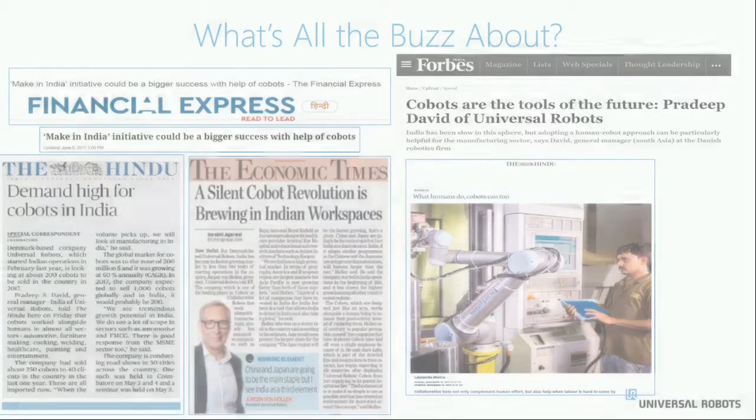The cobot market has been growing with a compound annual growth of 50%, one of the highest growth rates in the automation industry, in comparison to the industrial robot, which had a growth of just 5% in 2018. From the smallest companies to the largest multinational manufacturers, collaborative robots enable affordable, accessible automation to everyone. Cobots democratize automation by allowing manufacturers of all sizes to automate applications they may not have been able to originally, thanks to their flexibility, ease of use, and low footprint.

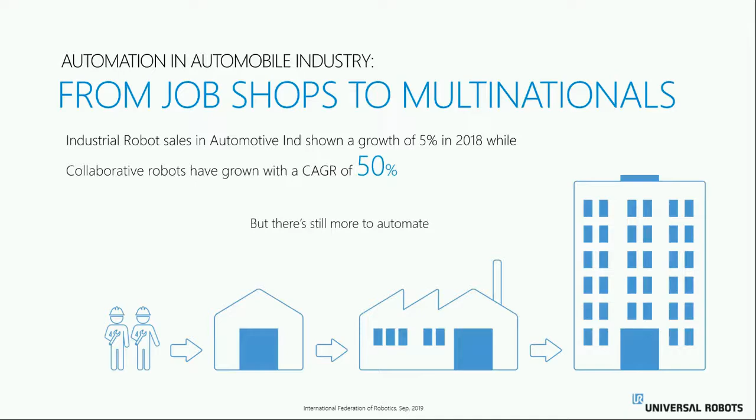To illustrate some of the reasons why cobots are becoming the automation solution of choice, have a look at this video.

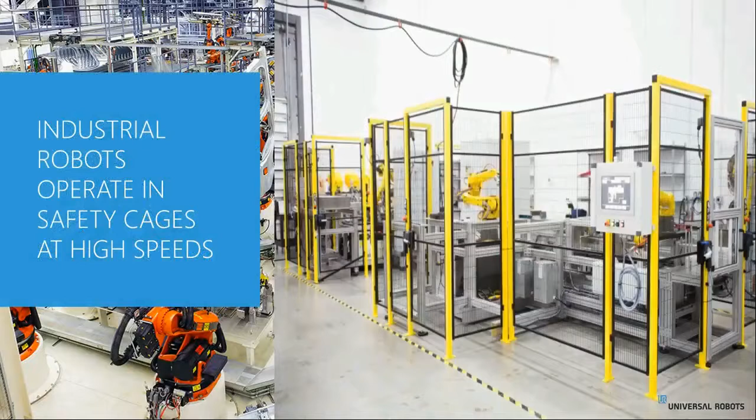I'm sure you saw some interesting features of the cobot throughout the video. Now let us go into further detail of this product. As you may already know, these are traditional industrial robots. If you compare these to the cobots you saw in the video, you will notice a lot of differences.

First and foremost, you will notice that industrial robots operate in safety cages. They are bulky and take up tons of space on the shop floor, so you can only deploy them if you have a lot of space.

You can also see many more differences here. If we compare industrial robots, they are large, fixed equipment, typically require a safety cage, are designed for high volume, high speed production, and are difficult to change to different processes or product lines. On the other hand, collaborative robots are small and flexible to fit any shop floor or process, work at about the same speed as a human worker, have fast setup, are easy to use, and are safe alongside workers.

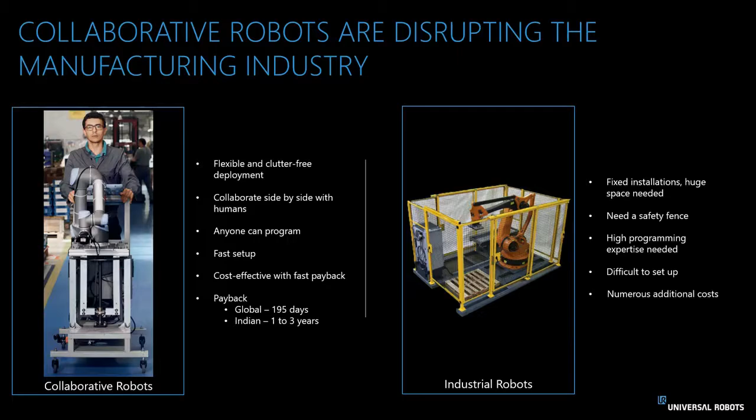Even though we can see the difference between these two automation approaches, we are actually just seeing the tip of the iceberg. This slide shows the difference between industrial robots versus cobots in terms of their implementation cost. If we talk about industrial robots, the first and foremost thing is the space requirements, which is 50% more considering any application.

Other than the hardware cost of the equipment, there are several other costs related to implementation of industrial robots like end of arm tooling, safety scanners, light curtain, three-phase power, software upgrade cost, integration and programming if the process changes during operation, and majorly maintenance cost, which is quite huge for any end user to maintain the robot life.

On the other hand, collaborative robots work on a single phase supply of 220 volts, which we generally use to run our mixer grinder or to charge our mobile phones. Cobots give huge savings in terms of power consumption. Other related costs are only for hardware equipment and the end of arm tooling. For the Indian market, we calculated this as 6.5 lakhs of saving in 5 years of operation. This excludes the amount saved on space, which is an additional cost advantage.

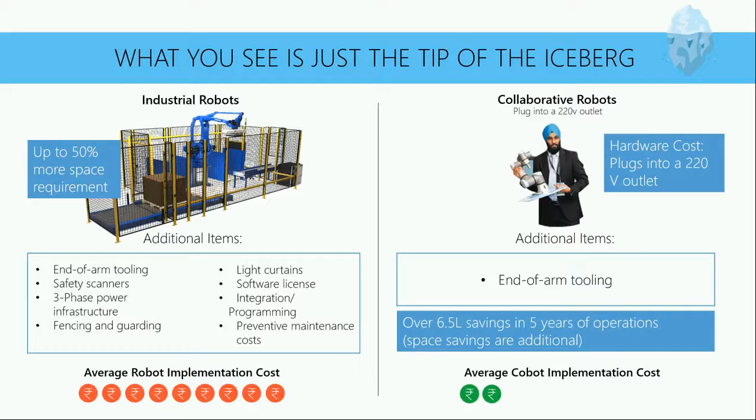You will be wondering, what is this ISO TS 15066? Just as the ISO standard 10218-1 and -2 defines 4 different methods to achieve collaborative operation, the ISO/TS 15066 does the same. It just adds some more guidance and requirements to the specification.

Safety rated monitored stop. A traditional robot used within a fence: a person can enter the workspace through an opening like a door switch, light curtain, or safe camera solution which identifies the person entering. When a person enters, the robot is paused. A safety rated stop function is used while the person goes in and does his job, for example loading, unloading of parts. When the person leaves the workspace, the robot can resume automatic operation. Calling this method collaborative seems a bit odd, but the standard defines it as collaborative because electricity is maintained to the robot motors while a person is present.

Second feature is hand guiding. This is hand guiding as a part of a robot operation, performing the work, not the teaching or the programming. This should not be confused with hand guided programming of cobots. This method is used in a traditional robot inside a fence when a person is entering the cell periodically as part of normal operation, that is to adjust a pose or to screw some screws in. When he enters, the traditional robot changes from non-collaborative to some collaborative mode. For example, maximum speed could be 100 mm per second and adjustment movement plus minus 50 mm. The car industry has used this method for several years to place chairs inside cars and to hold bumpers while they are screwing in place.

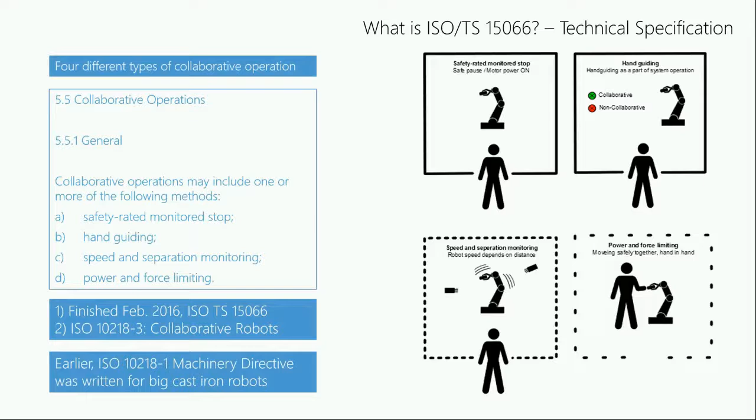By default, UR is giving all the 4 features in the software. Other than the ISO TS 15066 standard, UR Cobots has a patented safety system with adjustable functions which allow work at ease in a collaborative operation. Functions like joint position, joint speed, TCP position, tool orientation, force, momentum and power.

From the product line, Universal Robots offer 2 series, CB3 and E series. CB3 has 3 models, whereas E series has 4 models with different payload and reach. The models are UR3/UR3E, UR5, UR5E, UR10, UR10E and UR16E.

Our E series is the latest range of cobots. Compared to our previous generation of cobots, it has improved sensitivity with built-in FT sensor for process applications like polishing, grinding, deburring, etc. It's 4 times faster than our previous generation series with category 3 PLD safety, having 17 built-in safety functions with stopping time and stopping distance functionality, higher flexibility in the wrist 2 joints to avoid any pinching during motion. All the software updates are possible with one single file with easy programming flow given on the new capacitive widescreen Teach Pendant.

Universal Robots has set the standard for collaborative robots with fast setup, easy programming, collaborative safety, and flexible redeployment. Let's see short videos on each to better understand, one by one.

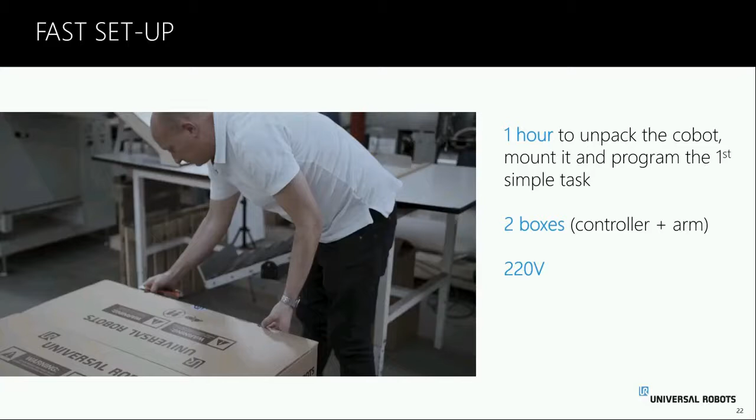You already saw the Cobot setup in the video I showed in the beginning, so I won't play this again. But our Cobot comes in 2 boxes. One contains the robot arm and the other one has the control box. It takes approximately 1 hour to unpack the Cobot, mount it and program for a simple task.

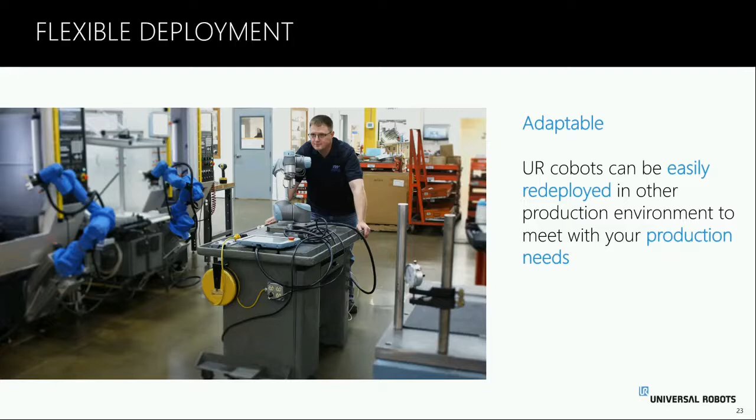As you can see in the picture, how UR Cobots can be easily redeployed in other production environments without changing the layout on the shop floors.

This is a collaborative robot, also called Cobot. It's a 6-axis robot that can be used for multiple applications.

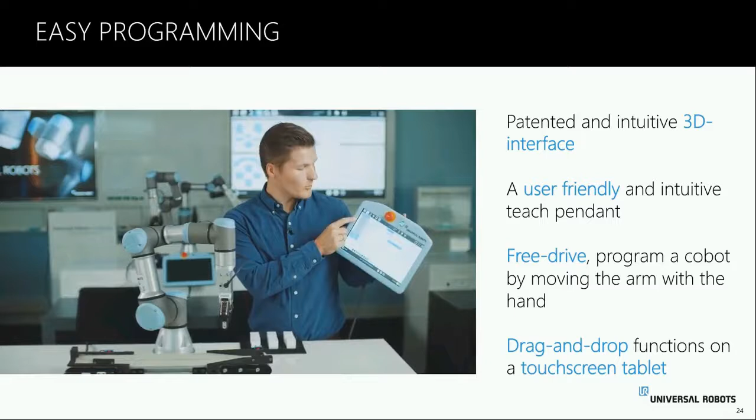Here we have the Teach Pendant. On the teach pendant we also have a free drive button which we can hold in, and then we can take the robot and move it into a certain position. We can also in our program tree take which function we would like and put it into our program. I have now made a small pick and place application that I will show you.

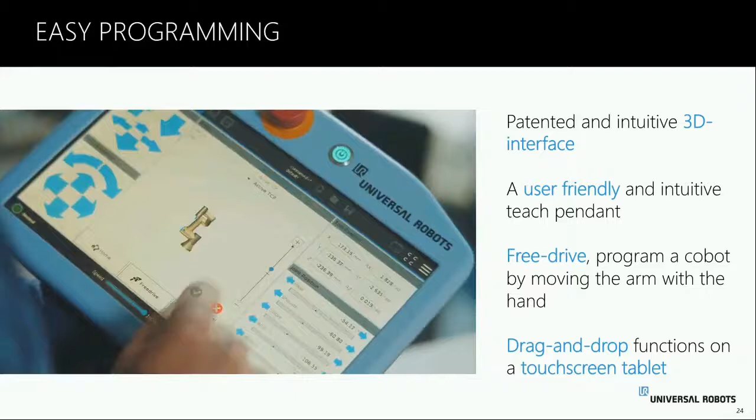One of the main advantages of Cobots is the safety. This Cobot has 17 built-in safety functions.

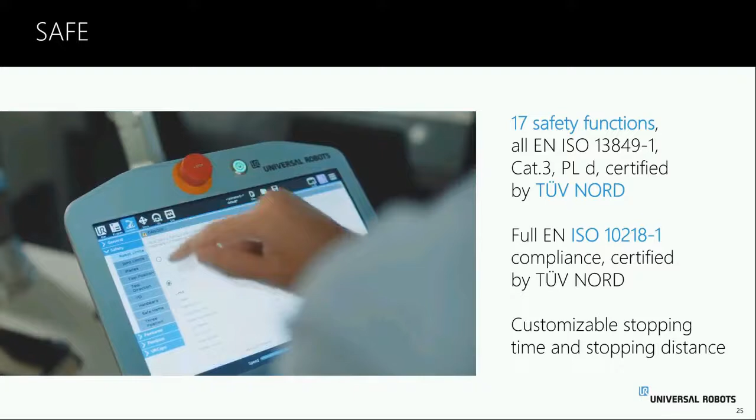Among the 17 safety functions, we have force limiting, which means that when the Cobot is in action and I accidentally step in the way of it, it stops, and I can just start it again from that point in the program.

Another feature is the safety planes, which can be set up to reduce the workspace of the robot so it can't collide with humans or equipment.

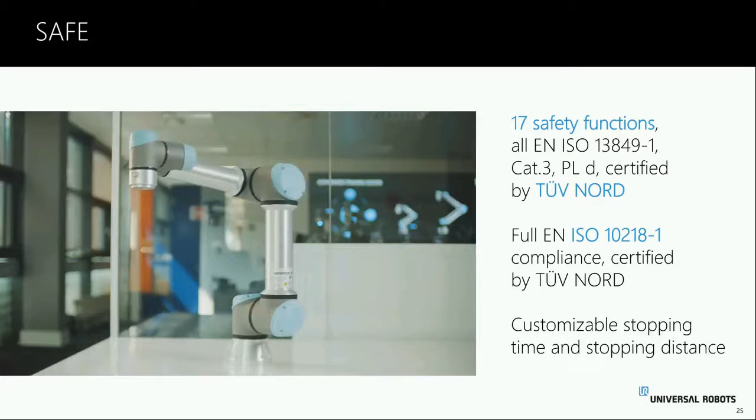Mankind's journey in manufacturing has gone through various industrial revolutions. While it is most widely agreed that humans are now in the fourth generation of industry, or Industry 4.0, many people, including our own company and founder, believe that we are actually on the fifth industrial revolution, where humans and robots are working together better and faster, enabling higher value creations.

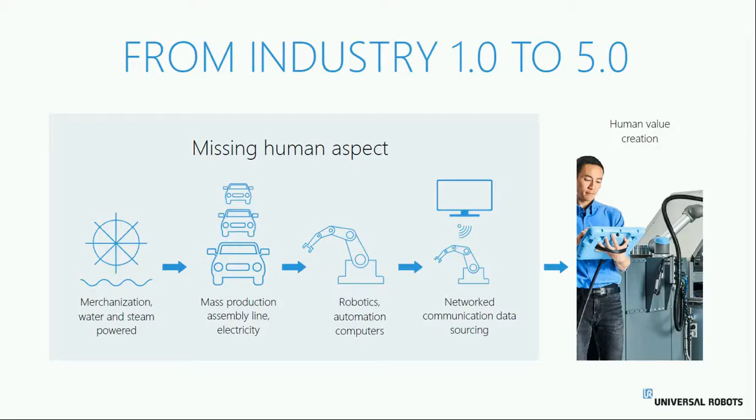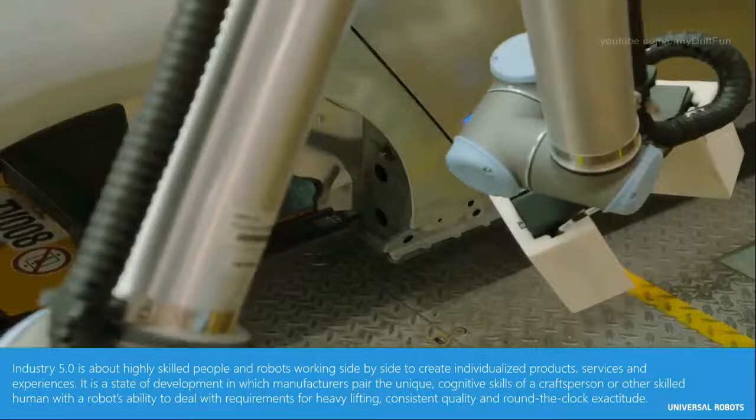However, you will see the cobots are not alone. There are also humans walking between the cobots to check that everything is running smoothly. Here, cobots and humans are working hand in hand, side by side. The intellect of humans is indeed paired with the consistency and precision of the cobots, ensuring that both do what they do best to churn out perfect quality.

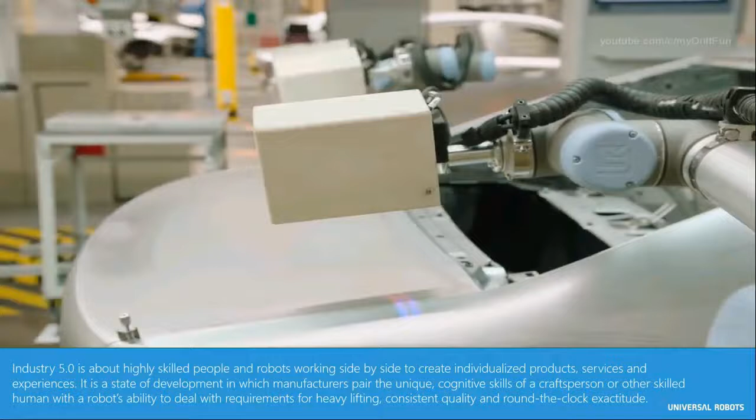By now, I hope you have noticed that instead of a big bulky machine, our cobot is like a tool that can be used to give a competitive advantage to manufacturers.

Now let's get into the possible applications of collaborative robots. In order to help identify the right application, one must carefully look into where the current automation gaps are.

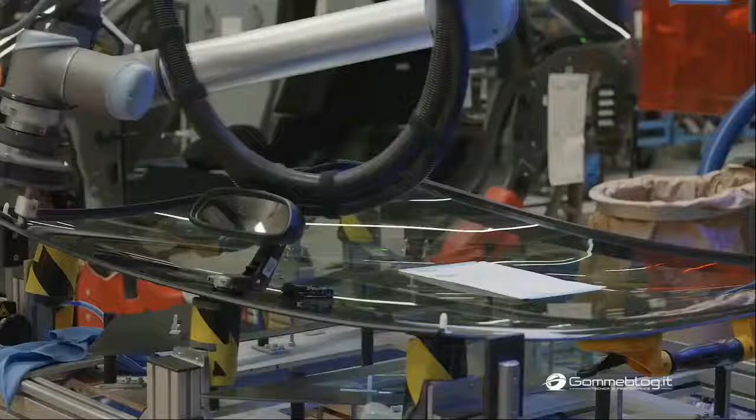This application is for glue dispensing on windshield glass for cars. Here, a UR10 Cobot is inverted mounted, which shows the flexibility of UR Cobots to be mounted in any desired position or angle. You notice that humans are also working alongside the Cobot on the assembly line without any cages. The 360 rotation on each joint gives more flexibility in terms of programming the robot.

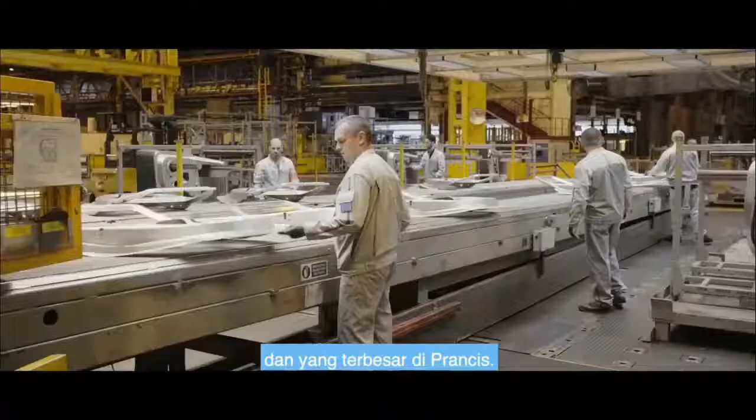This example is for a screwdriving application, which is nowadays in demand by industry who are using collaborative robots, as screwdriving is an essential task that requires precision and also presents a high ergonomic risk to workers due to the repetitive movements and pressure in the hands.

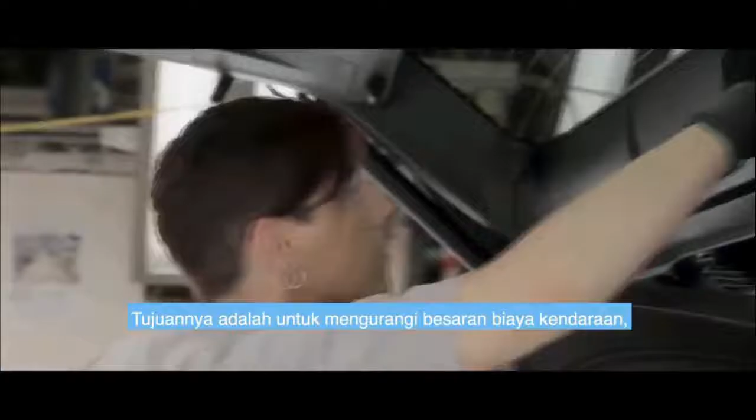I'm sure you have heard of Group PSA, the French automobile manufacturer, which includes huge car brands such as Opel, Citroën and Peugeot. They are using two UR10 robots for screwdriving in their assembly lines, suspended upside down. The robot has to screw on both sides of the vehicles without bothering the operators who simultaneously work at other assembly operations.

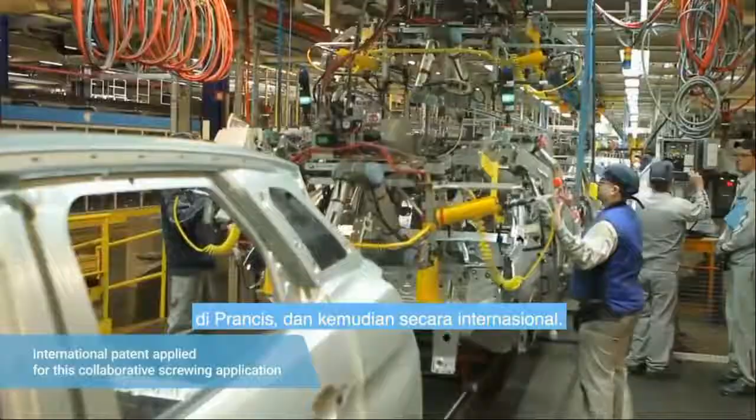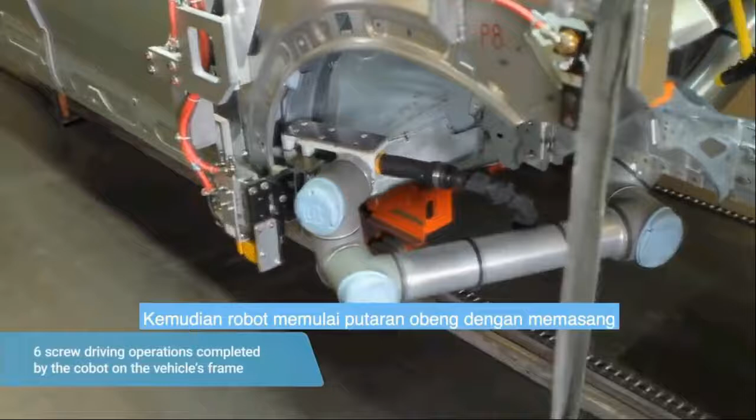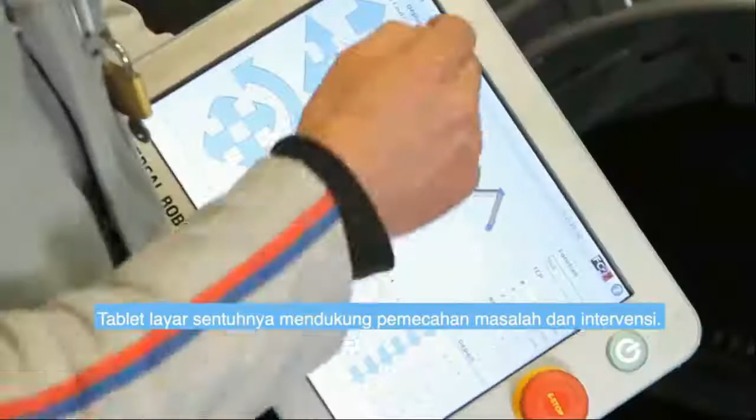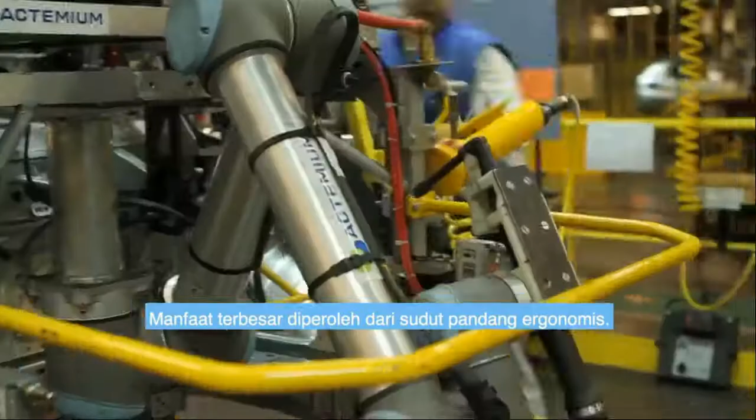In fact, Group PSA realized this new application was unique and even decided to patent the entire application, integrating the UR10 robot on a national and international scale. You will notice that a lot of flexibility is required for this kind of application. A traditional industrial robot would not be able to operate upside down or without cages with people on the shop floor, and fit so easily under the car body in places that are hard to reach. Only a collaborative robot can be used.

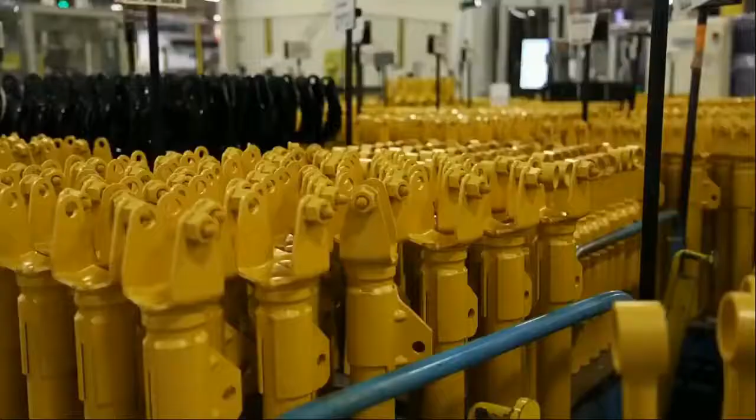At the plant in Hamilton, Ohio, 9 universal robots now enhance production, handling machine tending, assembly, and inspection tasks.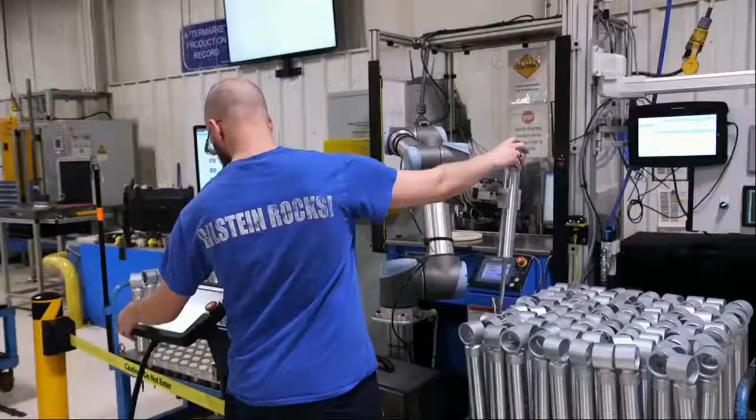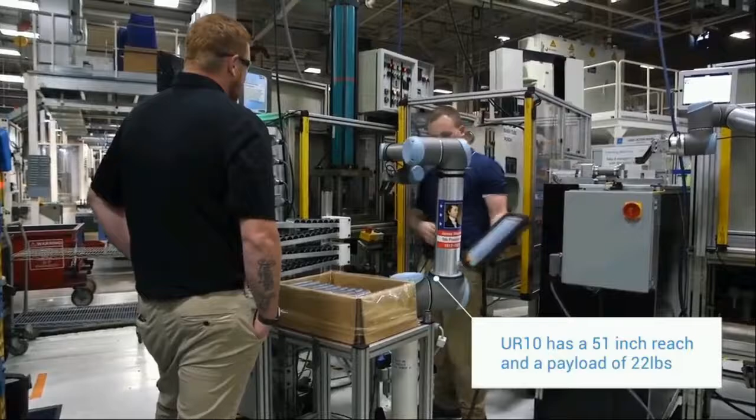We decided to partner with one source, one type of cobot, and that's when we picked our first cobot with UR. We investigated a few other options. The UR had the most advanced solution for more precise pick and place, repetitive, easy to maintain, easy to program, and I think the most important was the speed.

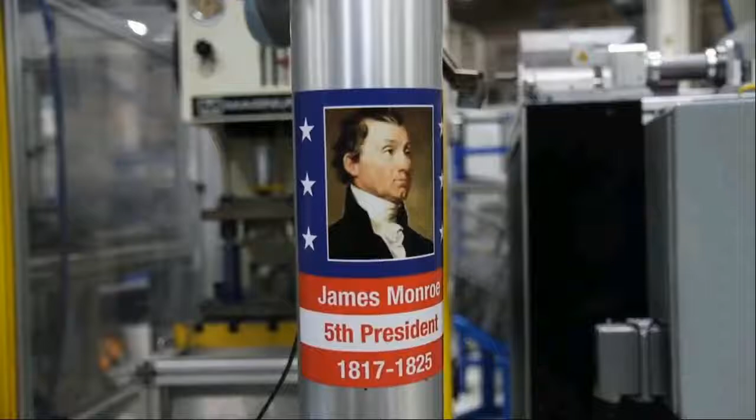It has been fantastic. Today we have 9+ projects implemented and another list of 40 more to be implemented. Our president and CEO came with the idea of naming them after the presidents of the US. So we started with the very first one, George Washington, and so far we have had 10 other presidents already in our facility. So this is a very important facility.

Once we got the first one done, it really spread quickly. We started to notice different applications all around the plant.

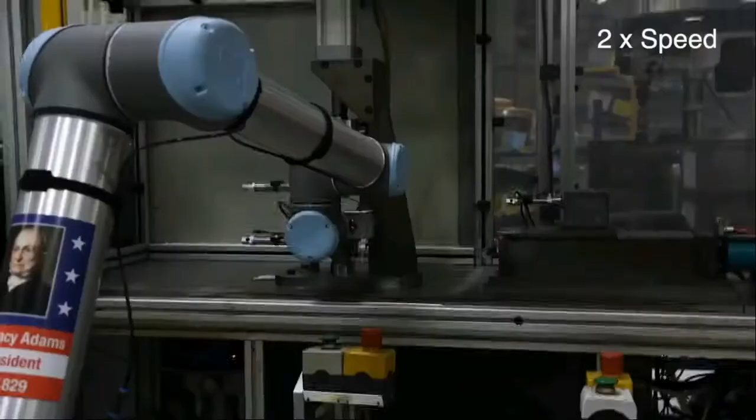The one robot has the inner tube, it forms it, punches a hole in it, and then places it on the transfer fixture. The second robot then picks that up, loads it into the marriage station where it grabs the outer tube and marries them together, then forms them one more time and sticks it on the exit chute. The UR10s also perform cleaning operations on the ends of the tubes, prepping them for welding.

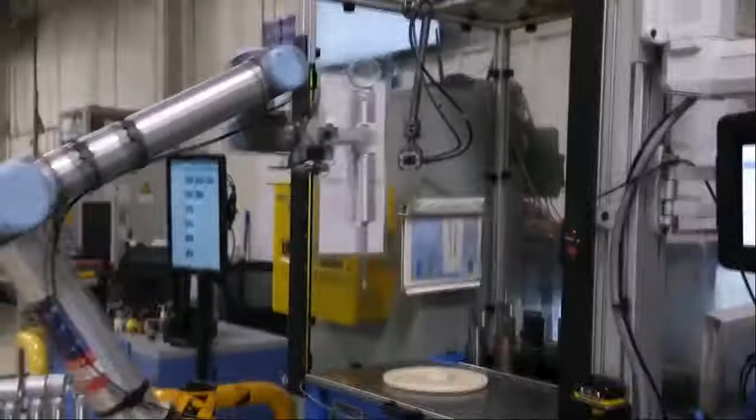In the final assembly, the cobots handle post-crimp fill and inspection. Before we would check 2 parts every hour to make sure we were still where we thought we were, but now we have 100% inspection.

There are different sorts of projects. There are projects that have longer ROIs and projects that have short ROI. Collaborative robots we see as a quicker return on investment. Right now we are attacking the ROIs that are between 10 and 14 months.

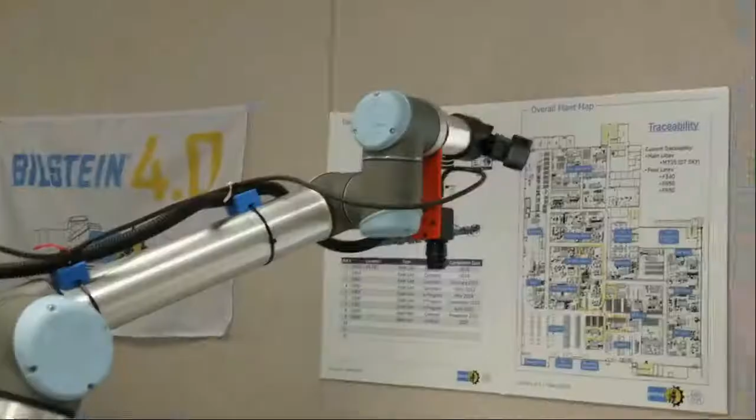For testing new applications, we have both the demo unit robots. In addition to that, we actually use RoboDK, and that helps to actually see the robot going through its workflow, figure out if our cycle time is going to be accurate enough that it's worth prototyping and getting it out there. And then whenever we deliver it, it's almost ready to go.

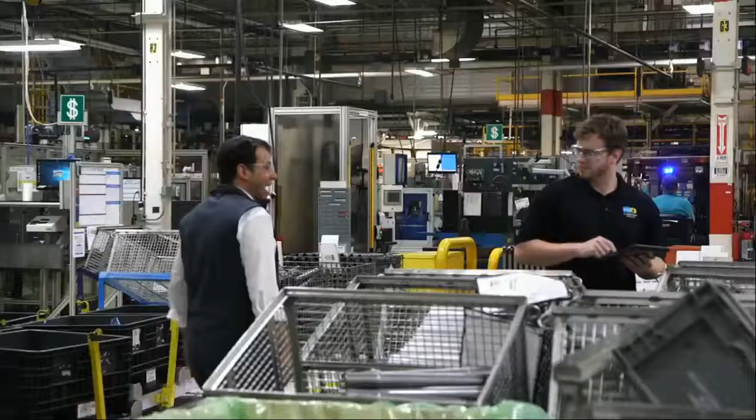The goal was not just deploying Industry 4.0 and cobots in this plant, it was literally to enhance the experience of our employees and to make this place a good place to work.

Operators are at the forefront of all the building that goes on in this company, so asking them, hey, where can we help you to improve the process, to improve the quality of this product, we find that very useful. No operator will lose their job due to a collaborative robot being implemented.

A lot of disruptions are happening in the auto industry. To survive, we need to do continuous improvement, do better than what we were doing yesterday.

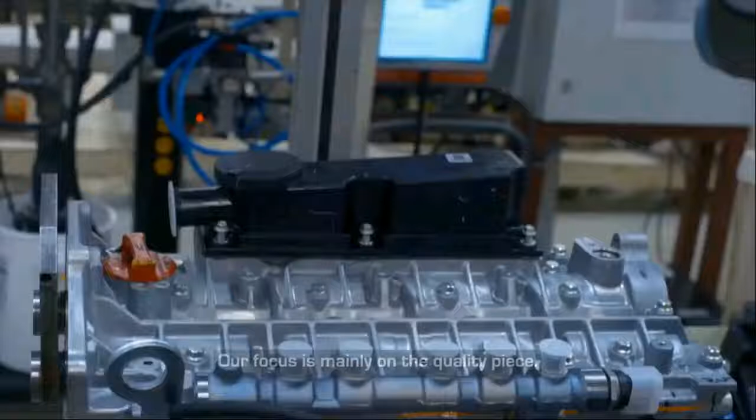I have been working here the last 25 years. Our focus is mainly on the quality piece. Whichever is critical to quality, we want to automate it. One of our team members gave a thought, can we go for a cobot, collaborative robot? We can implement it online and it can work with our associates.

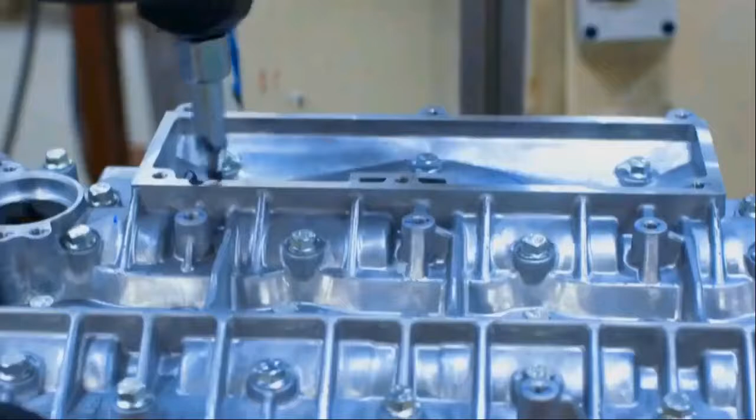It's not only the sealant application or the tightening application. There is a camera which checks the quality and it gets recorded. We are able to real-time monitor the cobot performance also. It is very safe, easy to teach, very flexible. When the cobot is working with them, people are loving it.

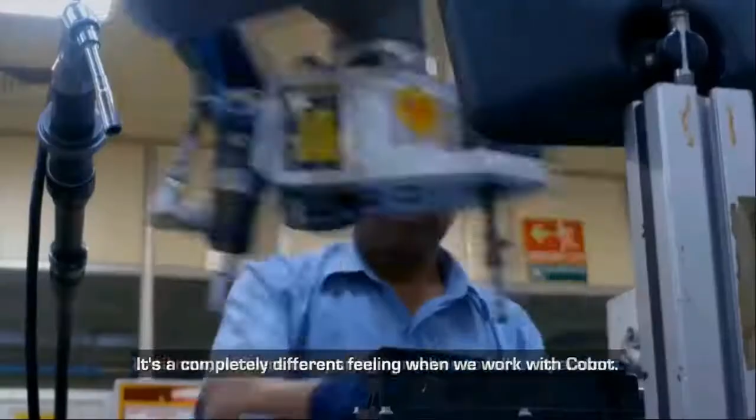The future is enormous. We all have to continuously improve with respect to what we were doing yesterday.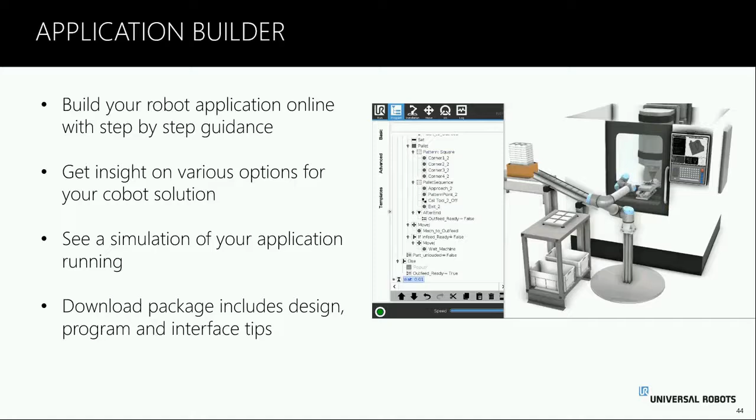We keep saying that our cobots are easy to program, but just to give everyone the chance to see it for themselves, we have Universal Robots Academy. It's a free online platform where anyone can learn to program our cobots in just a few hours.

Fill your automation gaps. Once you identify where your automation gaps are, you can identify the right application to optimize your manufacturing process.

The COVID-19 situation, which we are facing right now, is having strong repercussions everywhere, including the manufacturing world, where congested shop floors can make it hard to follow social distancing. Cobots, however, are an ideal solution as they work alongside workers on the shop floor and ensure quality and efficiency is optimized, all while making sure people maintain distance as per required safety regulations. It is important to adapt as quickly as possible to stay afloat, and cobots enable manufacturers of all sizes to become future ready.

Now I would be happy to take questions at this time. Please do write to me and I will answer them.

So that was the end of my presentation. We have a few questions still coming in, so we'll answer those.

Mr. Karthikeyan is asking what is the accuracy level. My team has already answered, but the accuracy level for third generation is 0.1 mm, which is 100 microns, and for fifth generation UR3E and 5E it's 30 microns, and for UR10E and 16E it's 50 microns.

The response time for the third generation series, when you press the play button on the teach pendant, is 8 milliseconds to do. But the E series is 4 times faster than the third generation, running at 500 hertz frequency, whereas CB3 is running at 125 hertz frequency.

Mr. Davis is asking, is it possible to share the end gripper design or supplier for painted parts polishing? The design of grippers are actually based on the applications, so it's better if you share your application and we can look into it, and we'll assign a distributor who can design a better gripper for your application. You can write to us at avin@universal-robots.com.